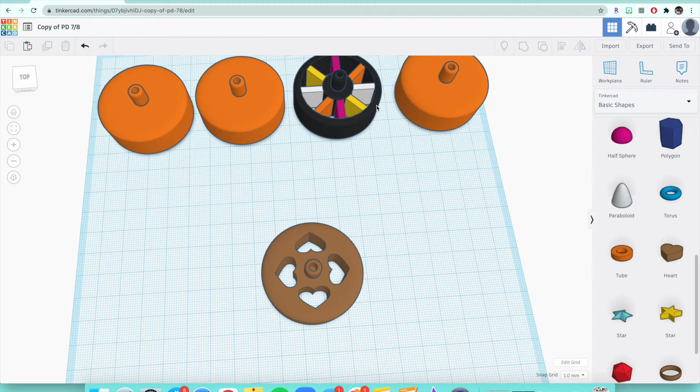Alright, so today I'm going to be showing you the last custom wheel option that you can do for your custom wheels, and that is the additive wheel. So last time we did the subtractive wheel, which you see right here, and we also did the spoke wheel in the first video.

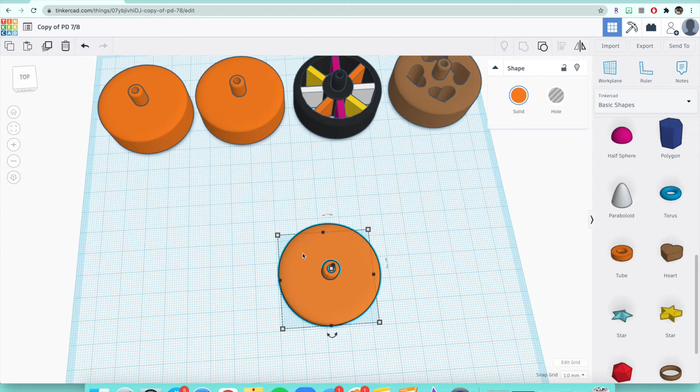So like I've been saying for the last two videos, these are all just examples of what you can include in your final custom wheel, right? So you could either do the spoke wheel and change it up, you could do a subtractive wheel and change it up, or you could do the additive wheel. Or you could just combine all three of these different ways that you could make your wheels and have a really cool, unique wheel, right? So it's up to you. These are just examples, but I want everyone to just try all three, just so you have the experience of that.

So like I said, this one is the additive wheel, so that means we're adding material on the outside of our wheels, or our design.

Okay, so now I have to rotate the wheel 180 degrees. So to do that, I have to go to this double arrow right up here, click on it. You could either type in 180, or I'm just gonna click and hold and drag it around till it goes to -180, or maybe positive. There we go.

Alright, now I can work on the outside of the wheel. So this is what you will see as the car is going down the track.

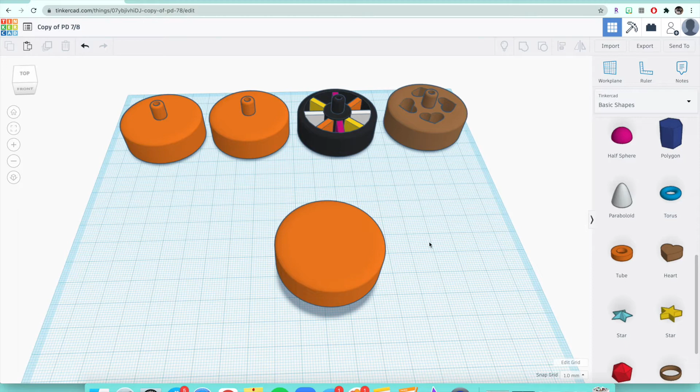Alright, so now we have to change where our work plane is, because right now the blue work plane is underneath this wheel, right where the plastic axle is. So I'll rotate this to show you that. Right, so when things snap on to the work plane, it's going to go to the blue, right? But we want to add material on top of our wheel, so on top of the orange, so we will change where our work plane goes.

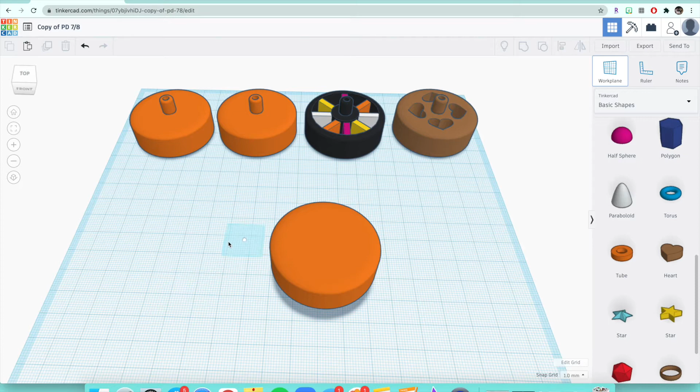So to do that, you are going to click the W button on your keyboard. So you're going to click the letter W, move your cursor around a little bit, and you'll see a blue box. Alright, so once you see the blue box, you're going to drag it over on the top of that wheel. Once it turns orange, you're going to click, and the work plane should change to be orange.

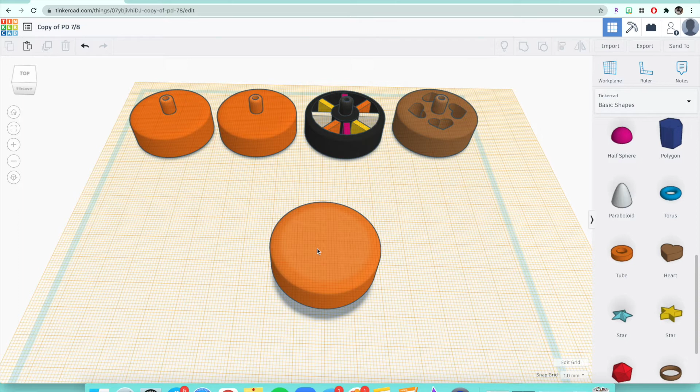Alright, so now that we have our work plane all set up, we want to add material on the outside of the car. Alright, so you could add any shape that you want on the outside, right? You can add stars, you could add your heart again, you could add this fun thing over here. Okay, you could do anything that you want. You could even use the scribble tool, like I said yesterday, to make your own design.

So like if you have like a flame, right, coming out of your wheel, you could use this to draw a flame. You could draw a smiley face. You could even put text on your wheel. Alright, the possibilities are endless.

But today I'm going to show you how to make spike wheels. Alright, so to do that, we're going to need cones. So we're just going to take out one cone for now. Alright, so we can get the dimensions all situated. And I'm going to put mine on top.

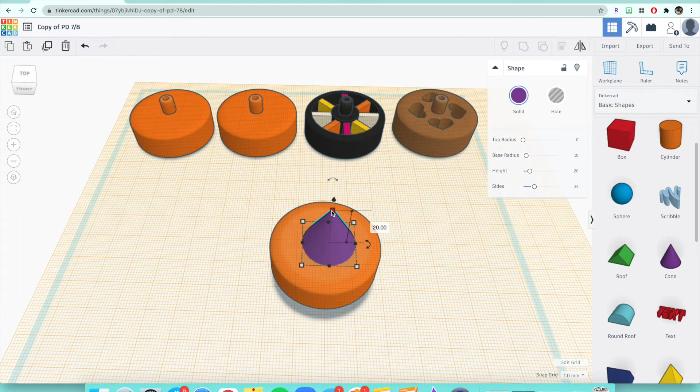And we're going to change the dimensions to, well, we're going to change the height to 10 millimeters first. Right, because it's a little bit tall right now. Then the dimensions for the length and the width, we're going to make the same number. Now again, you could make this any number you want, right? Like of course 20 is kind of too big right now, so I'm actually going to show you as an example.

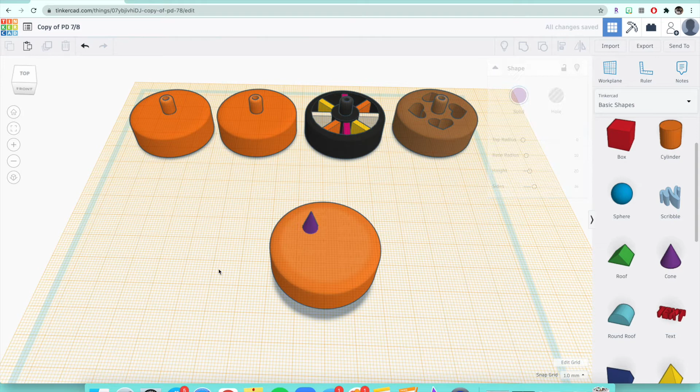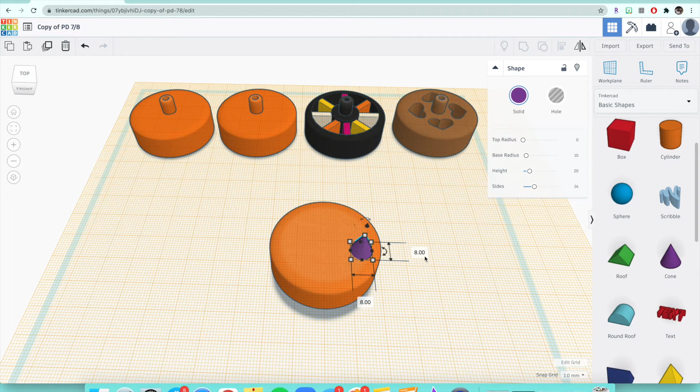This is what 6x6 looks like, so it definitely looks a little bit smaller. So you can also make your dimensions 6x6, or you can do like 8x8. Just make sure so it's an even circle, or it's a smooth circle, that it is the exact same number on the length and the width. Alright, so I'm going to change mine back to 6 because I just like the smaller looking spikes.

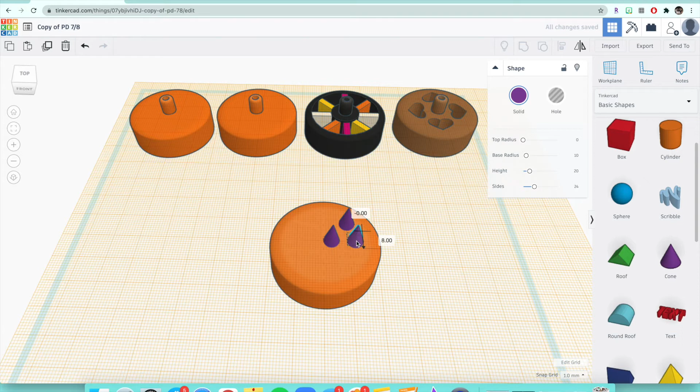And what you're going to do now is, since we have our dimensions all set up, you're going to make sure that that spike is highlighted, which it is right now. If it's not highlighted, all you have to do is click on it. And you're going to click Control-C and Control-V to copy and paste that spike. And then you're going to put the spikes around the wheel, anywhere you want. So I'm going to do that now. I'm going to place them all around the wheel.

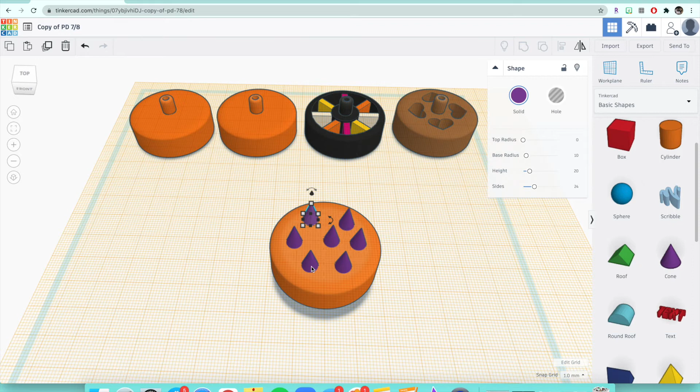Alright, so I have about 7 spikes. Of course, you can put more, right? But I have my 7, and you want to make sure that you have one in the center of the wheel.

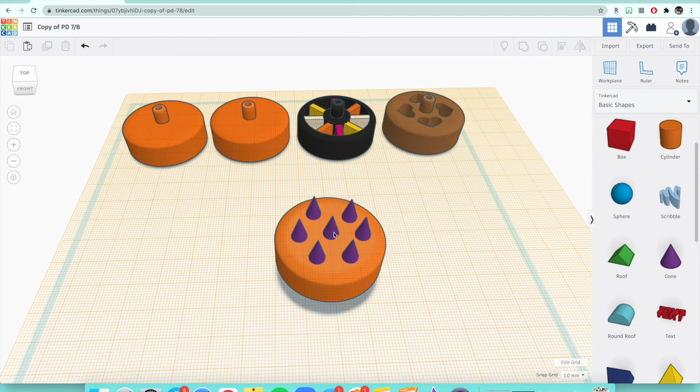Alright, so now we want to make sure that these go evenly around, because if I look at this from the top view, right, they're not even at all. So to make sure that these are all evenly spaced, I'm going to first click on that middle spike that we placed.

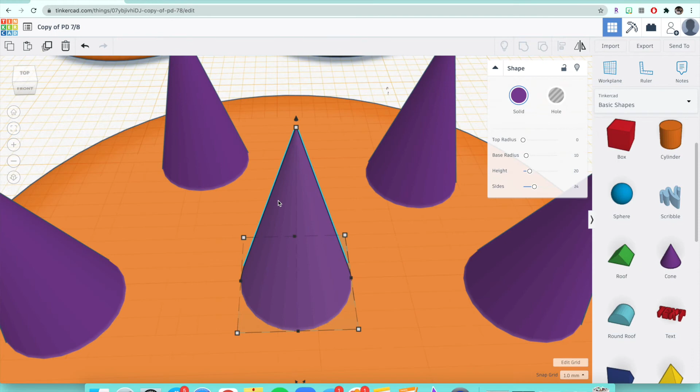Then we're going to go to the button all the way on the left hand side that kind of looks like a little cube that's not totally connected, and when you hover it over, it says fit view to selected shapes. You're going to click on that button and it'll zoom in to that shape that you just clicked on.

Then you're going to click top view, and now you could either use your trackpad to do this, or I'm going to click on the zoom out button over here just because I think it's easier and it goes out a little bit slower. You'll slowly zoom out from that one cone, and now you could see a really exploded view of the wheel.

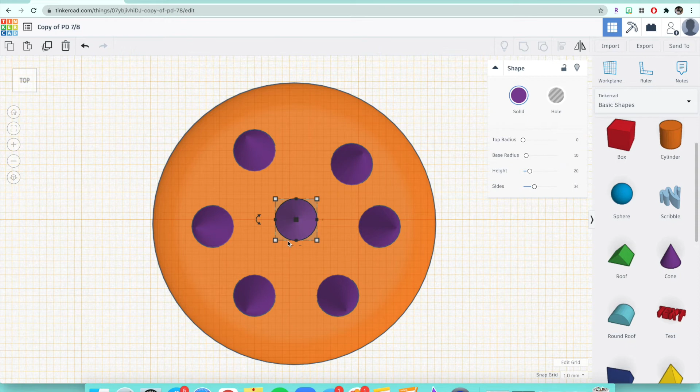Alright, so now you could easily reposition your cones to the outside of your wheel. So I'm going to do that right now.

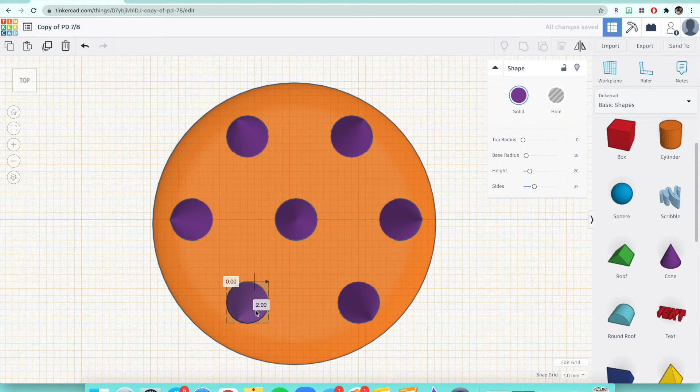Alright, so I'm not going to get mine perfect, obviously. I just wanted to show you how to get it perfect if you wanted to. Of course, you can play around with it a lot more than I am right now. But right now, that looks okay. Not the best, so obviously I would want you to try and make it a little bit more even than I am right now.

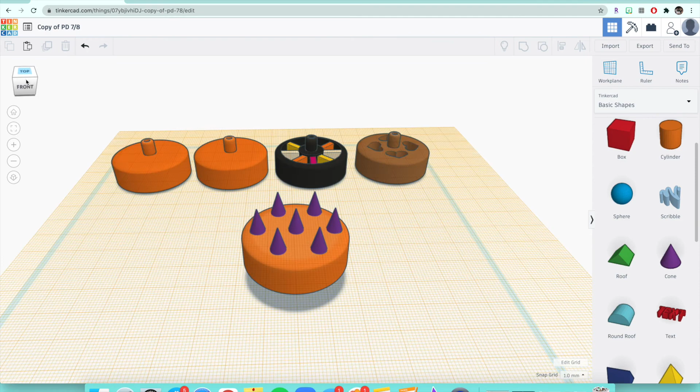But once you are done repositioning the spikes, or you can zoom out if you want, or you can leave it like that, but you can take a look at it, right, and we have all of our spikes ready to go. Now, before we group this, make sure that it's the colors that you want, right?

So, again, you could change the color by clicking on the shape, clicking solid, and then choosing your colors. So I'm going to change all my colors here, and then we can group it.

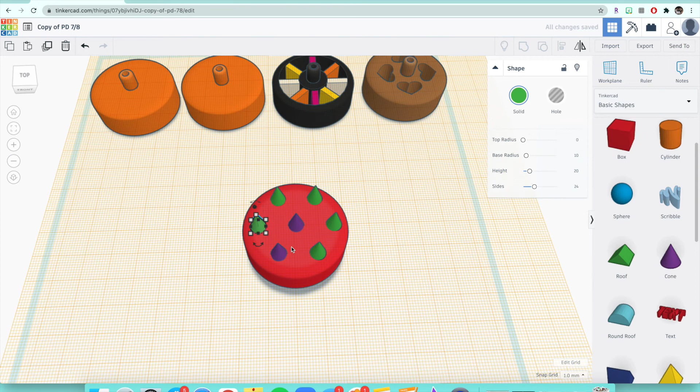Remember, you want to change your color before you group, because once you group, it'll all just stay one color. Okay, so that's very, very important.

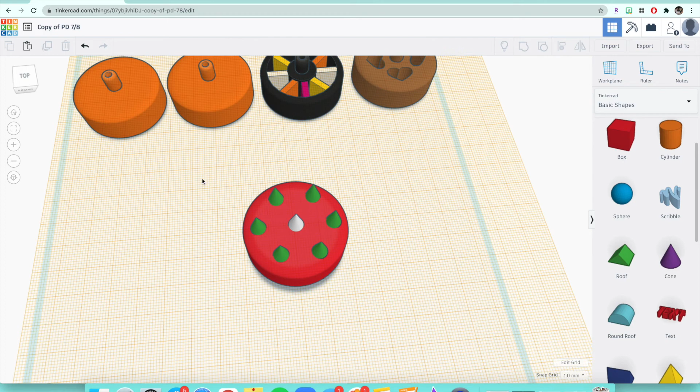Alright, there we go. So once you're done changing the colors, and it's how you want it, you're going to make that dotted red box around your wheel again to highlight everything. So you're going to click off to the side of your design, draw a red box around it, let go, everything's highlighted. Then you're going to come up here to the top right and click on group, which is right here.

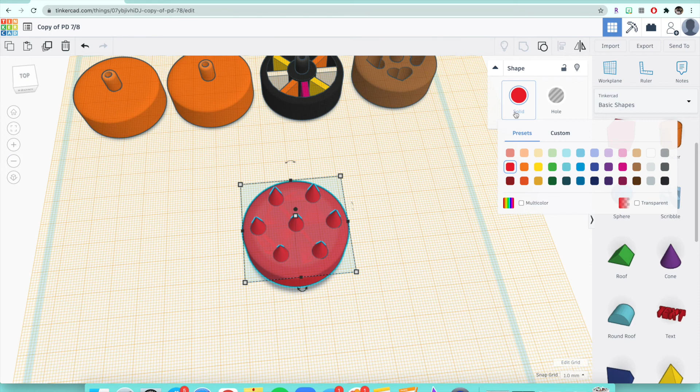Once you click group, if you did it correctly, it'll turn everything one color. And to change that back, you're going to click on that solid color. Mine's red right now since most of my design was red. And you're going to click on the multicolor button to show those colors that you had before.

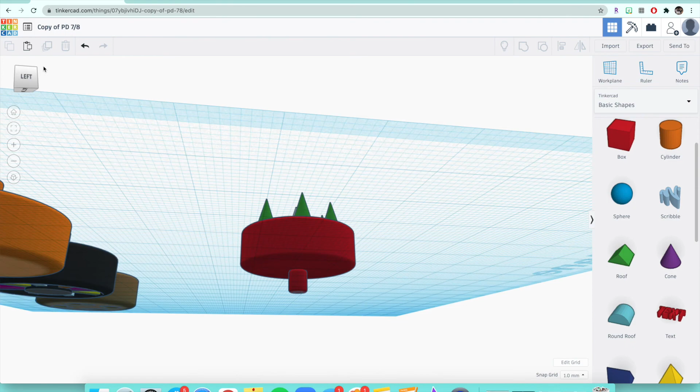Right, and then when you're done with that, all you have to do is move the work plane back. So you're going to click the W letter on your keyboard. You'll have that blue box again. You can click anywhere, and it will bring you back to the regular work plane.

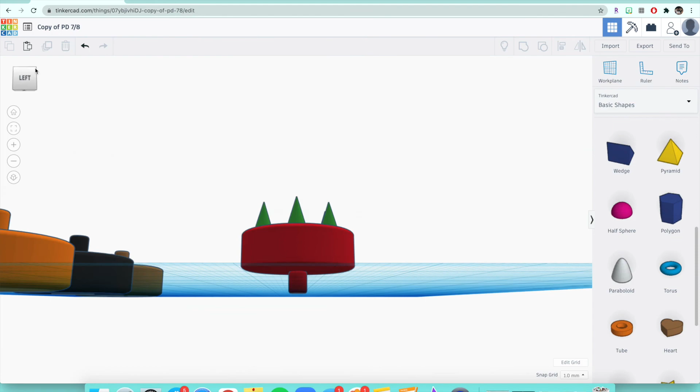And that is the additive wheel, right? So we made a spike wheel. So again, you don't have to make something that has spikes. Okay, you could add any other shape that you want, like I said, to the outside. Be creative.

We're not making these out of wood, so we could also make the wheels customized, which is pretty cool since they're not going to be a set plastic wheel that we have to use. So be as creative as possible. You don't have to copy what we did during the demos. You can make yours totally different.

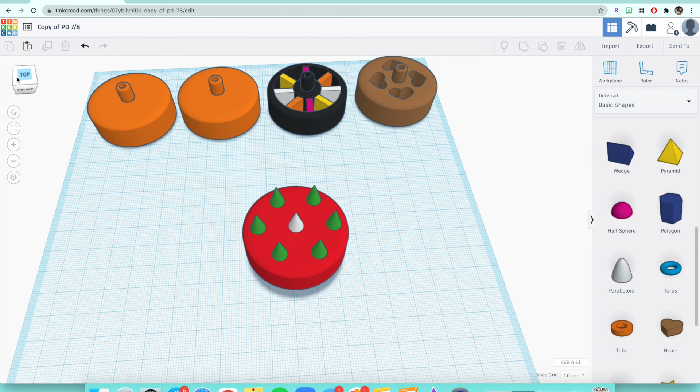And in the next video, I'm going to show you how to place your axle rod holes into the pre-made dragster body that I have for you.